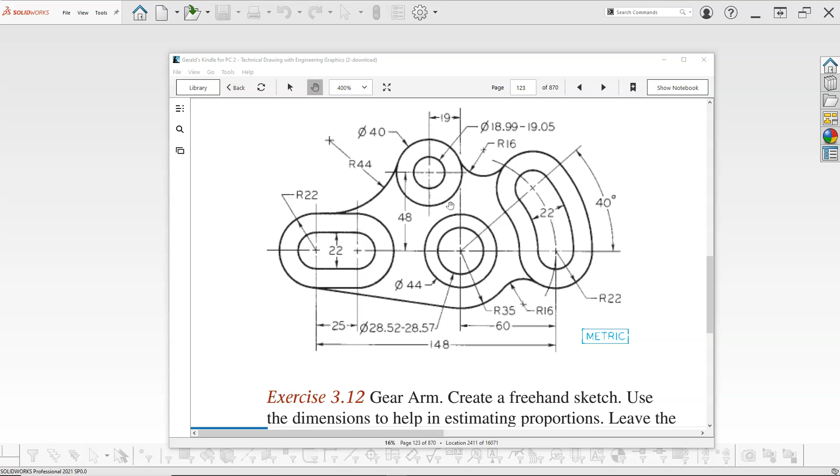And let's see, we're in metrics, so we'll take care of those as we get into the sketch. So again, we don't really have height, so the intent is not to make a solid, but we'll get pretty close. So pull up the part, turn on the origin, change the units to millimeters, grams, and seconds, open up a sketch on the front plane,

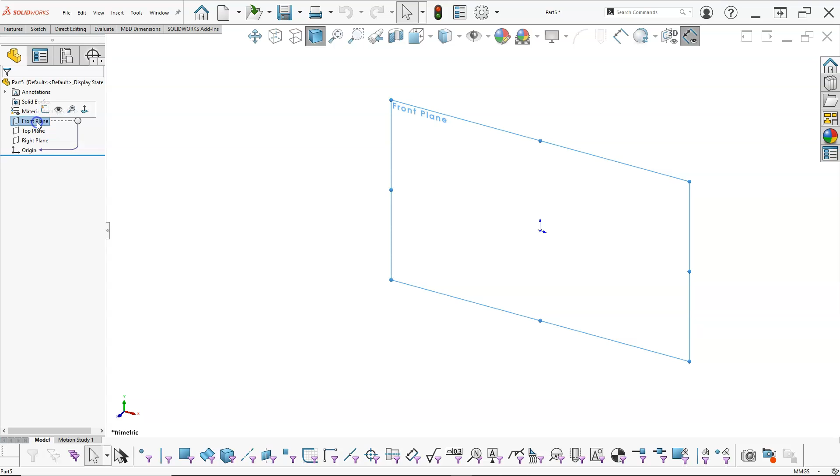and then we'll go into the center line, vertical, infinite length, attach it to the origin. Let's see, we need to accept that and go back to horizontal, attach it to the origin, then I can select. Okay, so I mentioned the slots. Let's see if they're present.

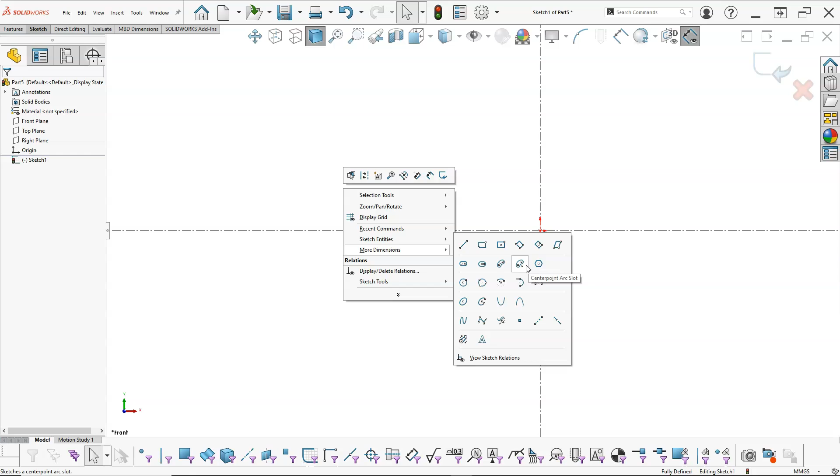Okay, so on the slots we have the straight slot to the two endpoints, and then a center point. Basically draw it from the center out, and then a 3-point arc, center point arc, and then we're back to the polygon. Alright, so let's pick a point and we'll drag it out, and this is going to be a center line on top of a center line. We probably could have just offset that, but I think that'll be fine.

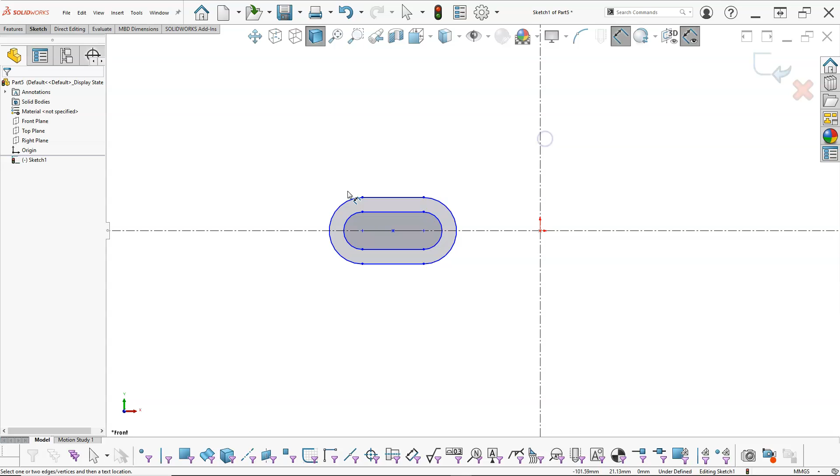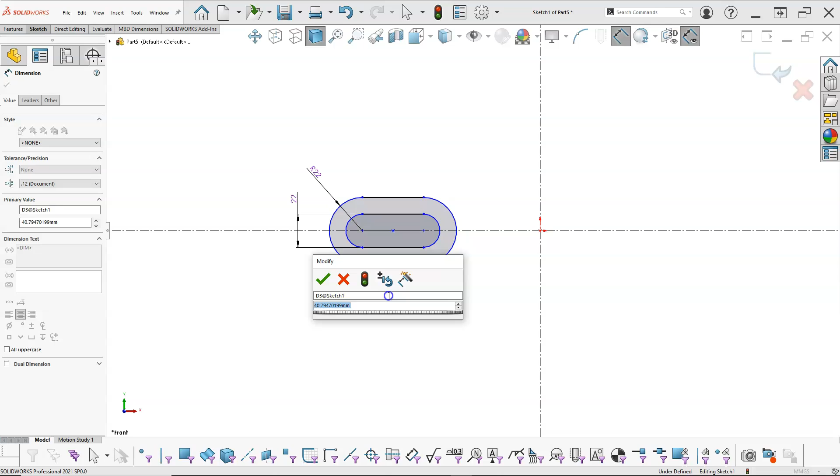So radius of 22, and then a height of 22, so more radius of 11, and then the distance, we're given 25. And because these are sharing those center points, their concentricity, they'll move together. Alright, so that gives us our first slot.

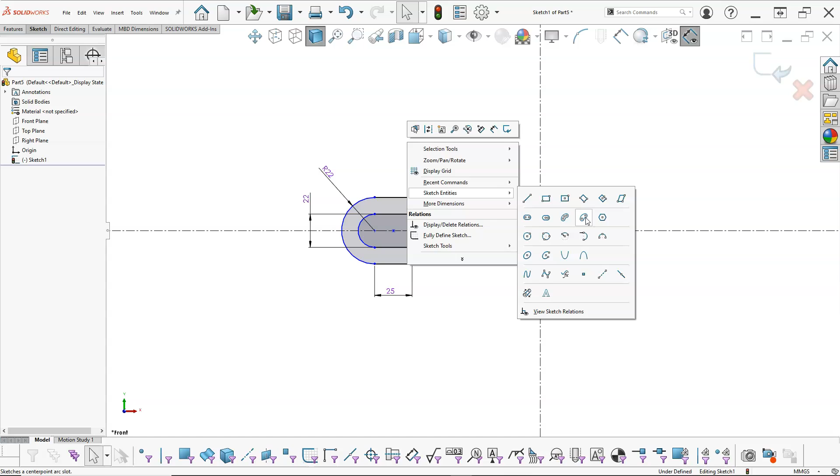Let's go into the sketch entities, and we'll pick up, looks like our curve slot is going to be a center point, and it goes whichever way it goes, and then we'll drag out. And I think on this one, it's doing basically the same thing, 22 and 22. Now we can go ahead and we'll pick those up, bring it to the same spot.

Alright, so radius of 22. And then we'll see if I go between the two arcs, it gives me the linear. Alright, so we need to be 60 off of the center. And then we have an angle of 22 degrees or 40 degrees. So I could draw a center line, or we could utilize the 3-point method. So the vertex, one endpoint, and the other endpoint switches us to an angle.

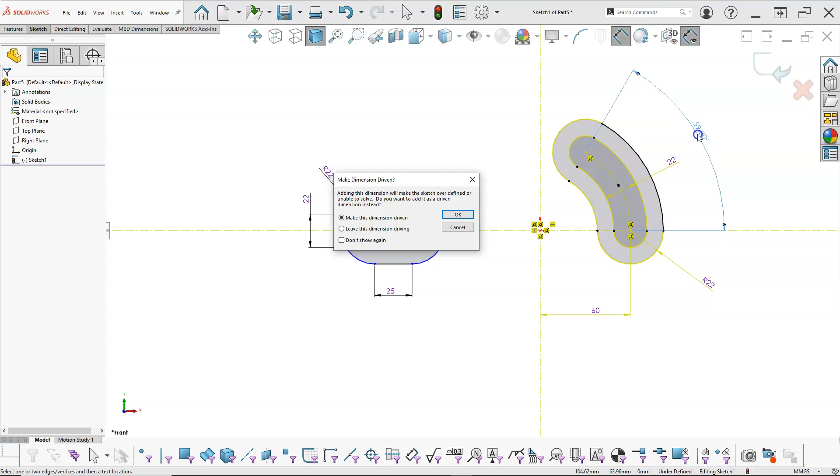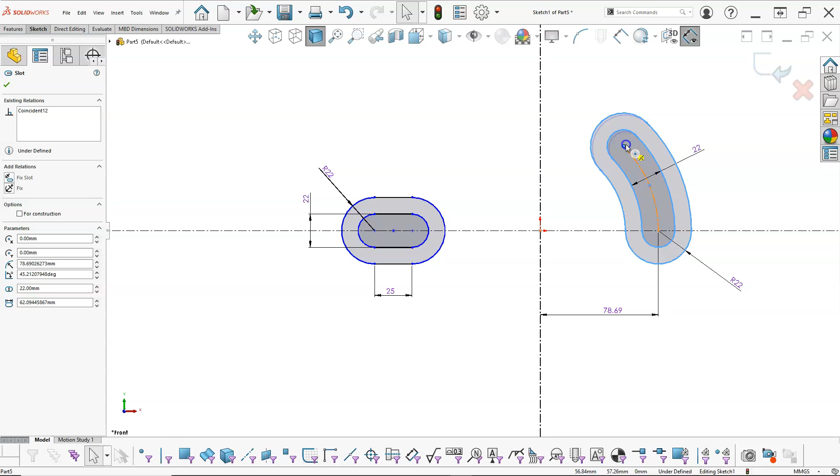Yeah, so it didn't like something there. Alright, so let's Control Z, we'll get out of that. Bring this back a little bit closer. See if that picked up. There we go. Now they're moving together. So we'll try that again. Vertex, endpoint, endpoint, and we're a little closer to the end dimension, so that looks pretty good.

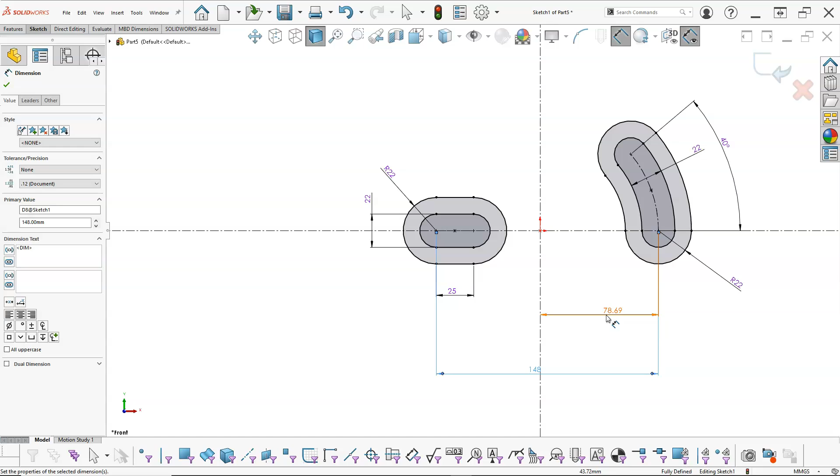And then 148 between the centers. Oh, and then I guess when I did the undo, that's reverted back. So alright, we've got our shapes, we've got our geometry.

Alright, so next set of circles, sketch entities, and we have a diameter on that one, that's our limit dimension. Okay, so the outside will be 40 on the diameter. It's 19 off of the center. And from the base up, we have 48.

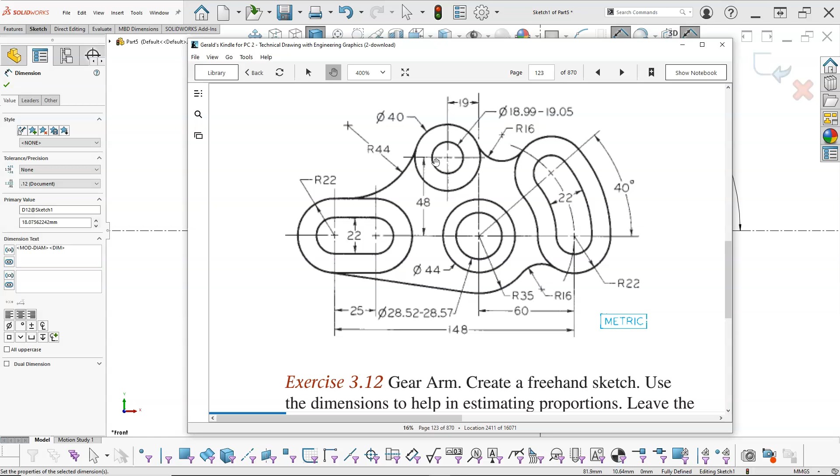Alright, so our limit dimension, let's go ahead and place that and accept whatever it pulls in, then bring this back over. So we're looking at maximum material condition, 18.99 being the smallest number. That's the most material in that through bore in that hole. So 1905 would be larger, so we want to make sure that we're at the 18.99.

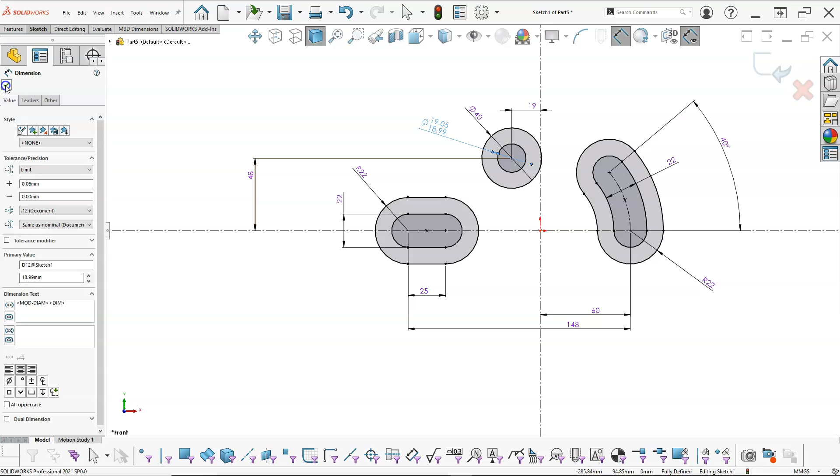The other one that I just realized is missing was at the origin, so place those two back into the dimension, and we have a radius or a diameter of 44. Oh, that was the radius of 35. So let's switch that over to radius, and that way I can just type it in instead of doing the math.

Alright, so again, 28.52 to 28.57. 28.52 is our maximum material condition. And then we'll go back to the limit, and we have 0.05. Alright, so 28.57, 28.52. Those are looking pretty good.

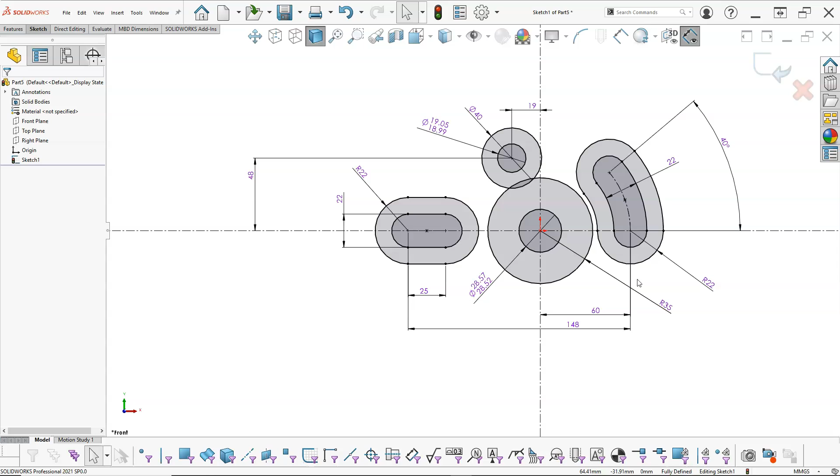Seeing if I missed anything. And then it's just going to be a matter of which side do I want to start drawing off of. Alright, so go into the line command.

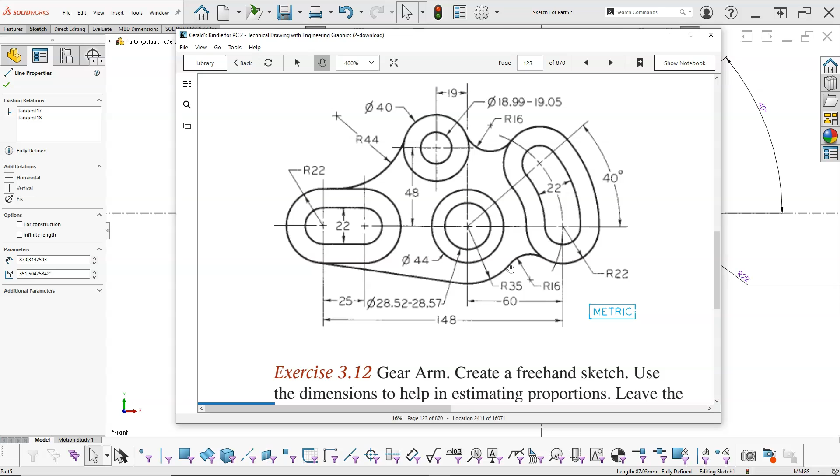That might have picked up tangency. Oh, and that's going to come down to there. Okay, so I have to follow my logic here, coming tangent to the tangent of the 35, and then we need the little radius into, so that's going to be a 3 point.

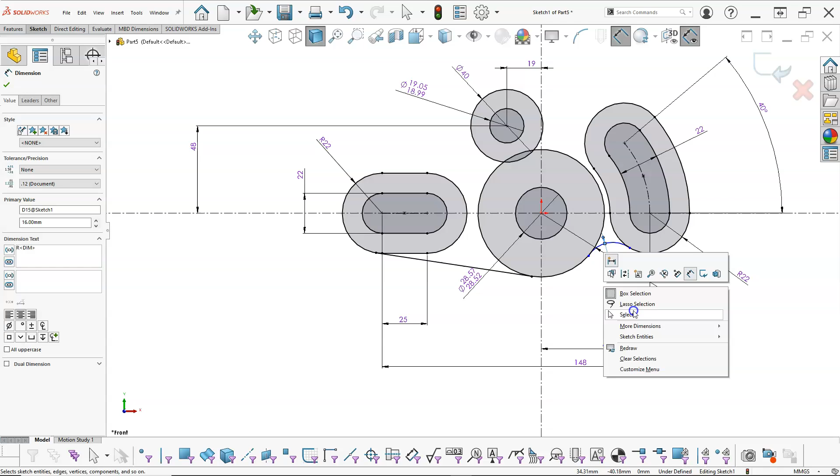Okay, so we get it close. We have the dashed lines that we need to drag a little bit further, getting it close to our geometry. Radius of 16. And then it didn't quite go defined.

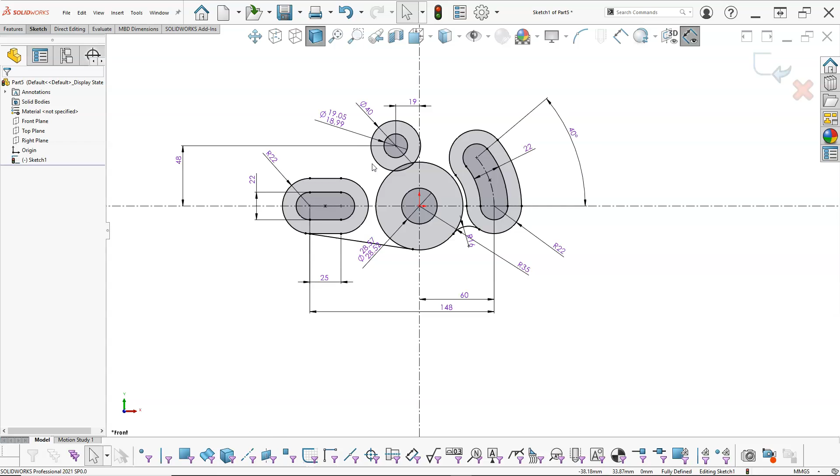So we've got the coincident, but you can kind of see the overlap and the overlap. So we're going to pick circle, pick the arc, go tangent, pick the arc, pick the circle, and go tangent. Alright, so that's looking pretty good.

And then we have another in the upper that's also 16 millimeters. Alright, even though it's facing the wrong way, you can still get it in there. So let's make sure the 16 fits. And then we'll do the same, select, control, select.

I must have missed, so go tangent. Alright, so those are looking pretty good. And then the last arc - it looks pretty far away, so I'm not going to assume that it is going to go right to that arc. So select, Control Select, Tangent.

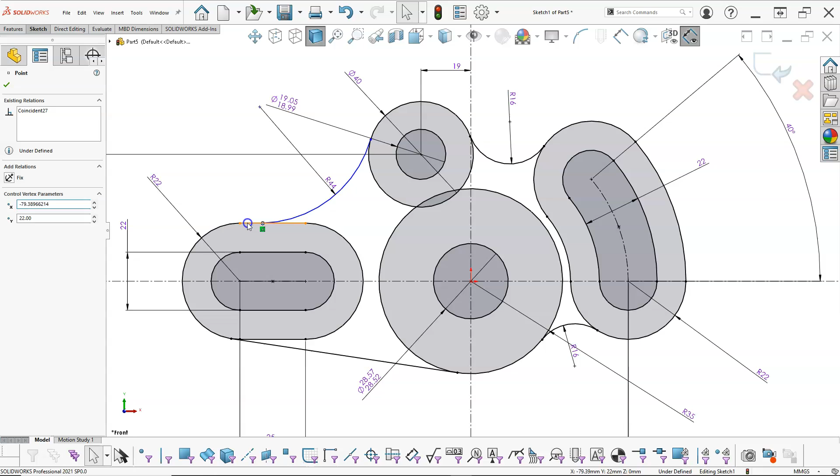Let's go ahead and put the dimension on it. Okay, so the 44 looks good. And with that being able to move, and we can go tangent.

Alright, so again, I would probably leave this with the contours and regions and just go ahead and build the geometry around it. But since we don't have heights, we can make some assumptions that would probably build the outside shapes, and then the bosses would end up being bosses, but they could be spot faces as well.

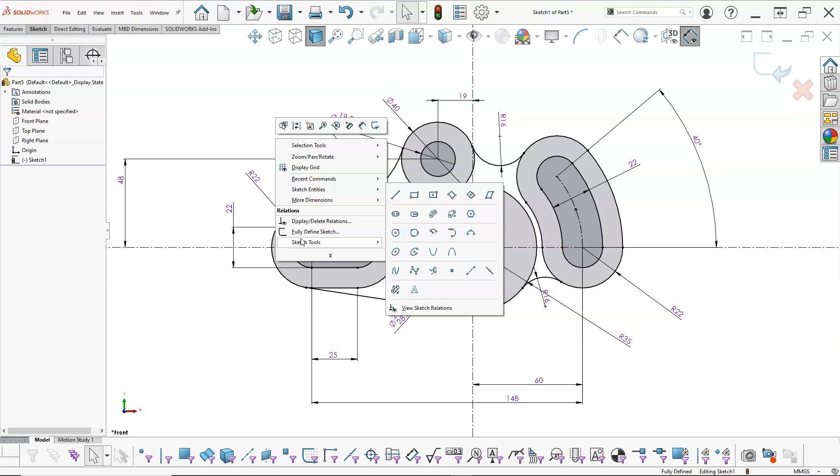Given that, I'll need to be in Sketch Tools, and we'll go to Trim Entities, and we'll start bringing this back. So got to make sure to get all of those segments. The center lines are going to be cutting objects. So other than that, looks pretty good.

Had the 44, the 28. Oh, there was another one in there. Okay, and let's draw one more circle. And I wouldn't have caught that if I didn't trim it out. So, well, would have caught it eventually.

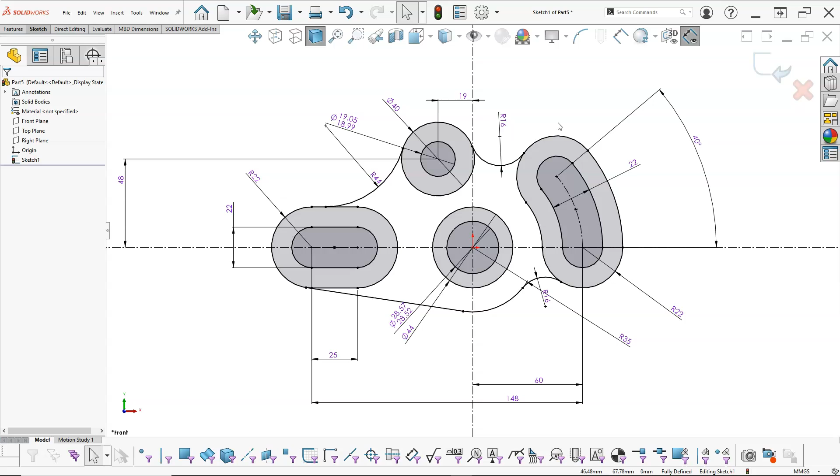But part of the process going through the iterations is to make sure that the geometry gets complete. Alright, so we'll go ahead and accept that and save it to our folder.